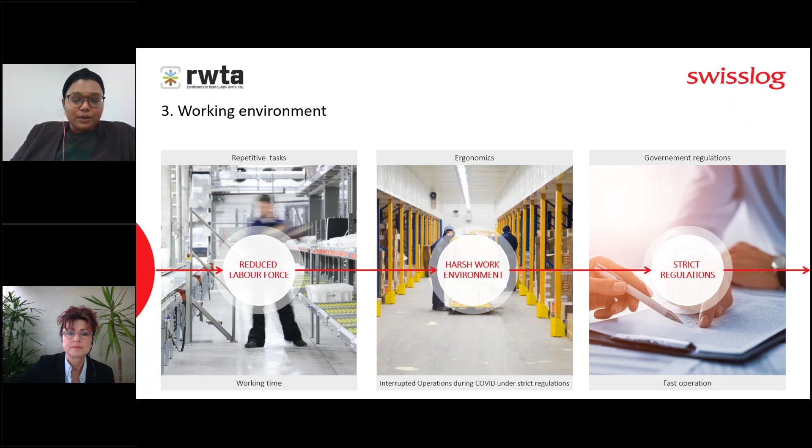I see, all right. Well, understanding the trends in the industry takes primary importance for business decision makers. And I believe we have a few decision makers in the audience today that will be interested to know your perspective on whether COVID-19 or coronavirus will ultimately accelerate the adoption of automation in the near, medium, or long term. That is really an excellent question.

Because the trends show in the global cold chain that e-commerce is set to increase. The international consolidation of cold chain companies is also building, so the smaller companies... the larger companies are continuing to grow bigger through the constant buyout of the smaller companies internationally. Demand for skilled labour increases, as does the international appetite for fresh and wholesome food.

In finishing, I can confidently say that COVID has taught us many things. Market trends support the growth of e-commerce, which has never been more popular than now, and that we indeed must be agile to ensure that operational challenges and the working environment must adapt.

All right, Marianne, thank you so much for giving us a very in-depth overview on the trends in cold storage. I think we've had some really good takeaways here. Now that we have an overview of the challenges being faced in the industry, viewers might be wondering, is there an answer or solution to these challenges? Perhaps now we could speak to Arjit, who will be able to tell us more about some possible solutions that may be able to help.

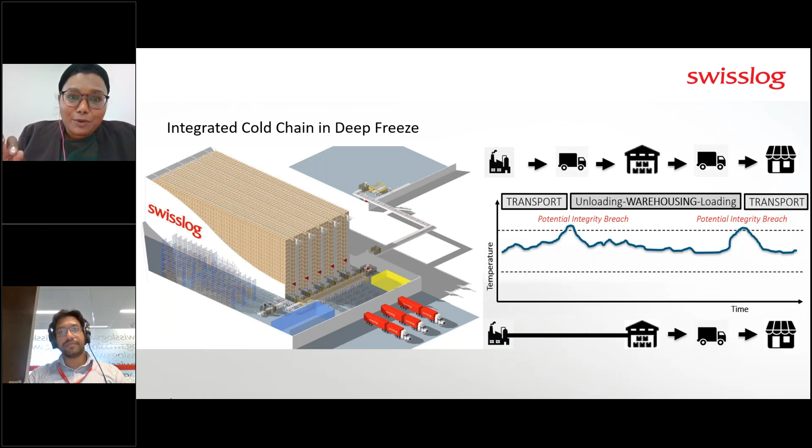Could you explain a bit more detail about the unique set of challenges in a temperature-controlled warehouse? Sure, thank you for that question. Swisslog does have an emphasis on intralogistics, so that is what is happening in the four walls of the warehouse. We've taken a look at the logistics processes and challenges associated with cold chain. Now taking a closer look at the intralogistics processes happening in a temperature-controlled warehouse, that is what is happening inside the four walls of the warehouse, they too have their unique challenges and demands.

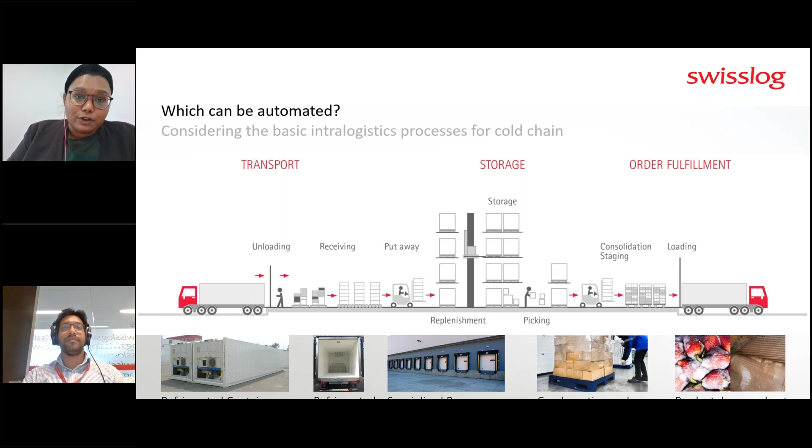Well, thank you for the insights, Ajit. Could you please give us more insights into Swisslog's range of automation technologies for temperature-controlled environments? Yeah, certainly. Thank you very much for that question.

These cranes are capable of operating in temperatures as low as -30 degrees centigrade. The new generation cranes use up to 20% less energy than previous generation cranes and are equipped with energy recovery systems. The energy recovered from braking the crane can be used for lifting the load or transmitted to other machinery in the facility. The best use case of a Vectura is when the requirement for pallet storage density is high, but medium or low throughput is required, at approximately 25 pallet movements per hour.

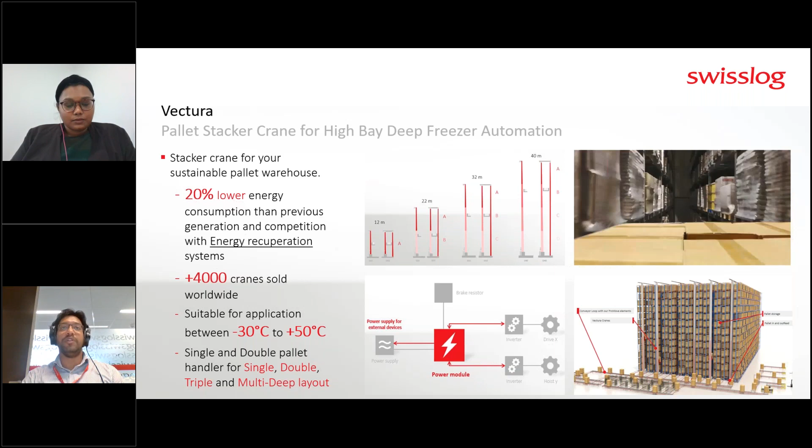So another pallet handling solution from Swisslog is the Power Store. The Power Store is a pallet shuttle system for robotic storage and retrieval. Currently, there are more than 25 installations of the Power Store worldwide, and one here in Australia.

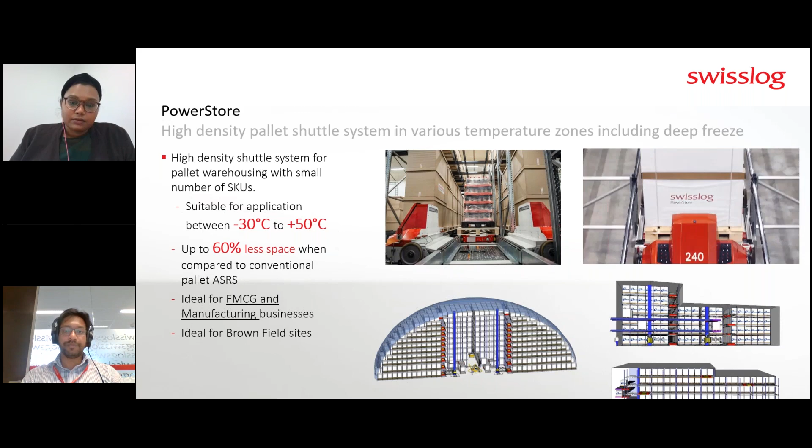These systems are ideal as a buffer solution for high velocity SKUs coming from production. They are therefore a case or item pick solution where high throughputs are required. The picking can be done by a person at a goods-to-person station or by a robot. The equipment is rated for freezer and chiller environments.

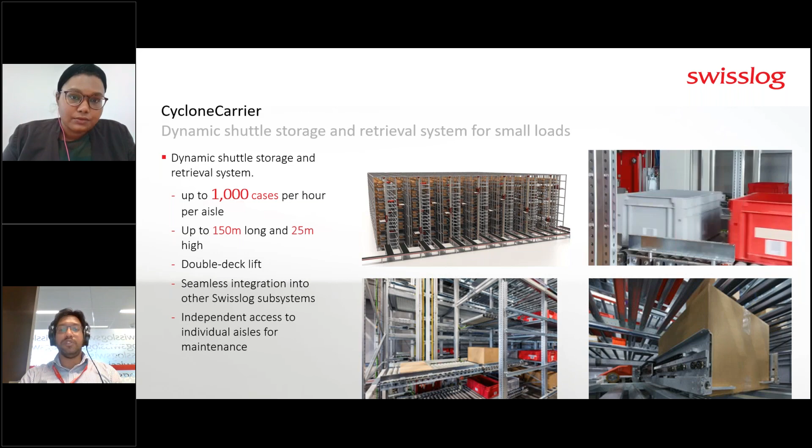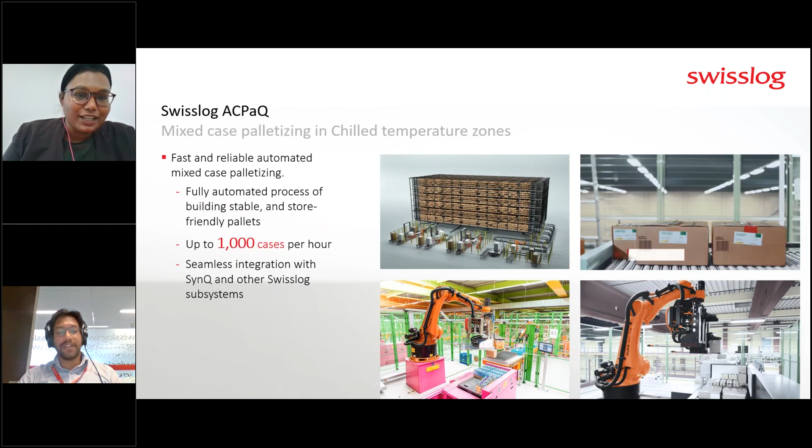Well, that was actually very insightful, Ajit. All these new technologies are very innovative. But I guess the question on my mind is, how can we apply this to cold storage?

Perhaps you'd like to explore the software applications as well?

The collaboration platform is the heart of our software solution, allowing integration to subsystems and interfacing with hosts. The operational services actually cover the shop floor processes in a warehouse so that customer requirements such as replenishment, put away rules, or return logistics can be achieved, offering the agility that is practically required in a demanding warehouse environment.

The intelligence services is where our customers stand to gain the most value from. It consists of bolt-on manager applications such as availability manager, cockpit manager, and event manager. These are live and historic reporting error alert tools where notifications can be sent via SMS or email. Think of SynQ as a smart conductor of the orchestra.

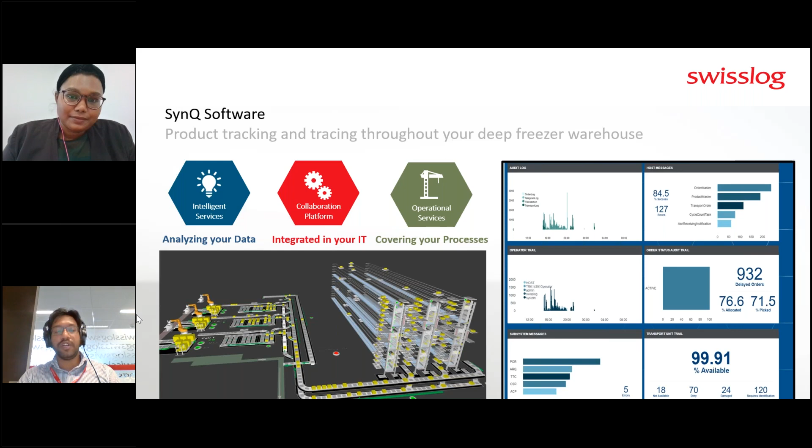So I've spoken a little bit about what our technology solutions are. I'd actually now hand over to my colleague from Southeast Asia, Sky, to talk more about how these solutions from Swisslog can be adapted to specific customer requirements and what's the scope of the application. Thank you so much, Ajit.

Sky, welcome. I guess my mind is still wrapped around the application part of it because we've heard a lot of products and the theory on how things work from Ajit. For example, let's say I'm a bakery manufacturer. Is there a one-stop solution for me? How can I incorporate the solutions that we've just seen into my day-to-day? Maybe this is something you could share with us?

Good afternoon. First of all, I'm Sky Lee, sales responsible for the Southeast Asia region. So, to answer your question, Charlie, there's no one shoe that fits everyone. The requirement and the solution for each customer depend on first, their budget, the throughput, SKU range, footprint, and whether we are picking full pallet or mixed case picking.

So the full pallet is actually fairly simple, and I will not go into that. I will go into the more exciting part, which is the mixed case palletizing part. Over here, you can see an overview of 4 automation concepts where we will try to use the technologies introduced by Ajit just now into a concept or solution that works for a customer with different needs.

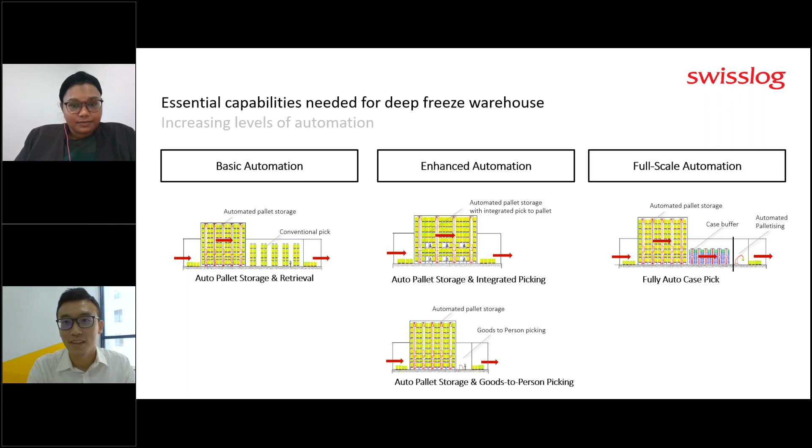So next slide please. The first basic automation concept is where we automate only the pallet storage area. Over here, you have different functions on the bottom of the screen: from the left, the receiving, storage, picking, and dispatch. In terms of storage, you can see two different types: the automated pallet storage and the selective racking at the conventional pick area.

Here you can instantly see the difference between them, where the automated pallet storage is actually taller, up to 4 times more in the extreme case. Here we are looking at about just twice the height. And the second obvious difference is the aisle width, where you can see the aisle width for the automated pallet storage is much narrower compared to the conventional pick area.

So when the pallets of frozen and chilled foods are received, they are put away to ASRS for storage. Pallets are triggered by the intelligent WMS, and ASRS would feed the pallet replenishment to the manual picking cold room. The warehouse operator would then pick the orders from the fixed pick location. Once the order is completed, we will have dispatch staging prior to loading to the truck. This method is suitable for customers who have a high percentage of full pallet dispatch, and customers with existing manual storage who would like to have a first experience of ASRS could also consider this.

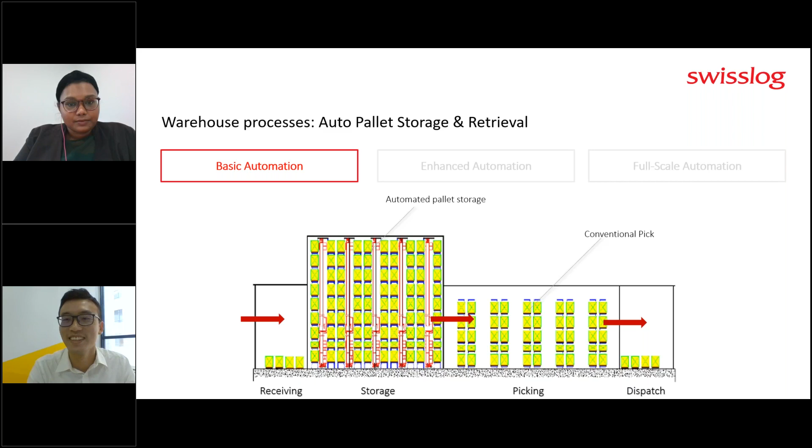For the next level of automation, we can consider an enhanced automation concept with automated pallet storage and integrated picking. The key difference to basic automation lies in the ASRS, where we build in the picking function into the ASRS facility itself. Certain levels in the racking are dedicated pick aisles, where operators do the pick run inside, and pallet replenishment to the individual pick faces is automatic using this Vectura stacker crane.

This method is suitable for customers who have a high range of SKU, and you can see that the cold room footprint is slightly bigger because we need to incorporate the picking tunnels inside the ASRS.

For the next enhanced automation concept, it consists of automated pallet storage and also a goods-to-person picking workstation. The key difference here compared to the previous concept is that we bring the picking out from the freezer environment, and the ASRS crane is responsible to bring the product pallet to the workstation, and the operator will perform the case picking according to the system instruction.

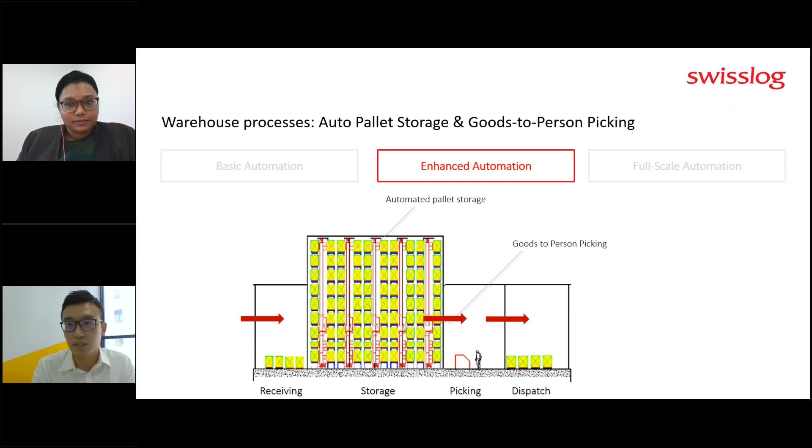Often the operator is picking multiple orders simultaneously to achieve higher efficiency. The residual pallet then returns to the ASRS until the next call out. This method is suitable for customers who want to eliminate the presence of operators inside a deep freeze environment and also achieve high picking productivity.

For the highest degree of automation, we may consider fully auto case pick. The fully auto case pick module is capable of handling high throughput and high number of SKU and orders. It ensures that frozen product does not remain outside its deep freeze zone beyond the stipulated time through the intelligent warehouse management system SynQ. The beauty of this concept is that there is no human touch involved in the picking process at all.

In terms of process, the ASRS automated pallet storage will depalletize the pallet, and the system will buffer the cases required for the order picking in a case buffer. The software will configure and build the best pallet based on a set of parameters like dimension, size, weight, and family grouping. Upon the system instruction, the case buffer will then send the cartons required in the exact sequence and orientation required for the pallet order palletizing.

This method is suitable for customers who have very high throughput and high number of SKU, while at the same time they want to achieve the process without any human touches. So in a nutshell, Charlie, to answer you, there's no solution that fits every company.

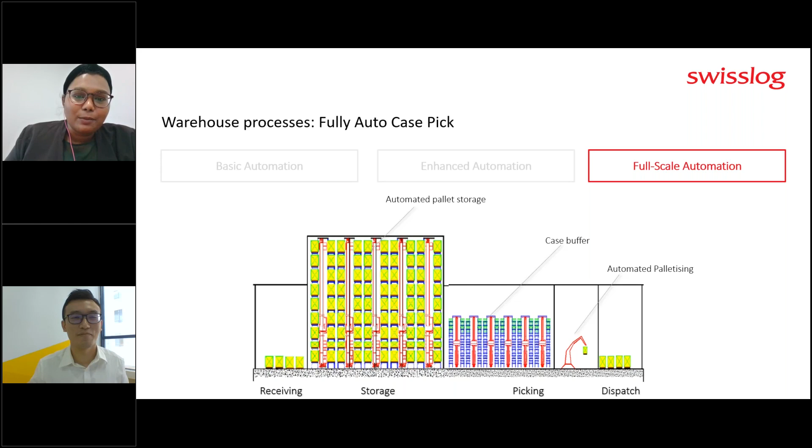Well, thank you so much, Sky, for that. That was certainly very informative. Again, tapping on my analogy of me being a bakery manufacturer, I'm having a hard time imagining how this could benefit my operations. So could you maybe share a little bit more about the direct impact of your technology?

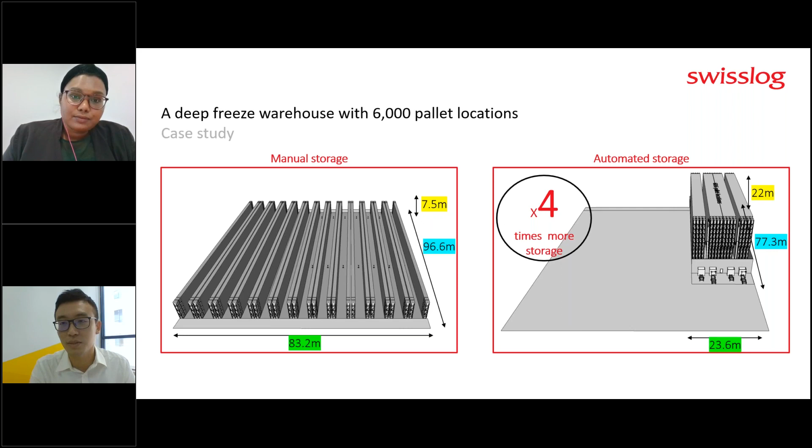So the 75% saved can be used to pay off the additional investment that we need to incur when we go for automation or an automated solution. All right, next slide, please.